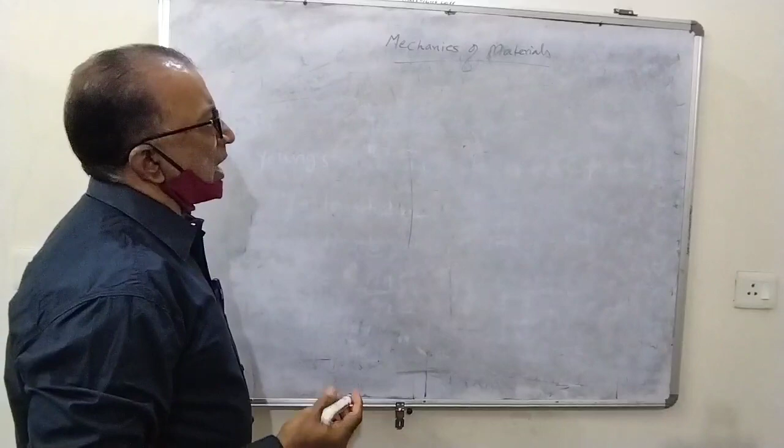In the previous class we were discussing about shear force and bending moment diagrams for the various types of beams. Now in today's class, let us start working out on the shear force and bending moment variations in the case of cantilever beams.

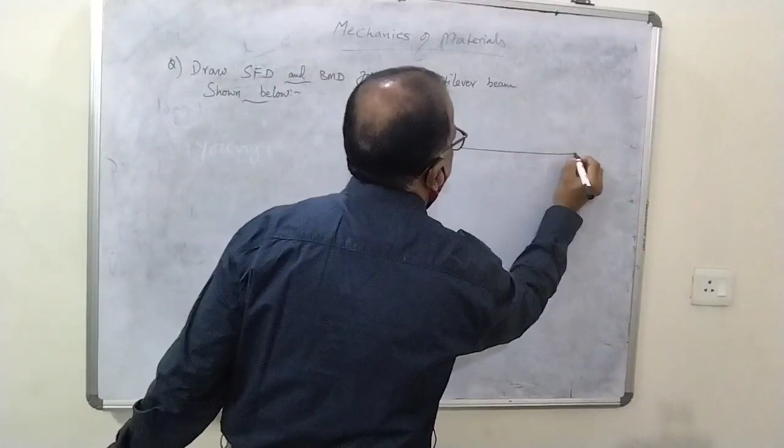The procedure is, whatever the cantilever beam is given, draw it. Let us say AB is the cantilever beam and let its span is 3 meters and it is acted upon by 3 point loads at C, D and B. Let us say this is 10 kilonewtons, this is 20 kilonewtons, this is 30 kilonewtons.

So to draw the shear force and bending moment diagram, the procedure is generally extend the lines below the points which are given on the beam on one side of the page. After then, you all know only one support is here, other support is free. Such beam is called as cantilever.

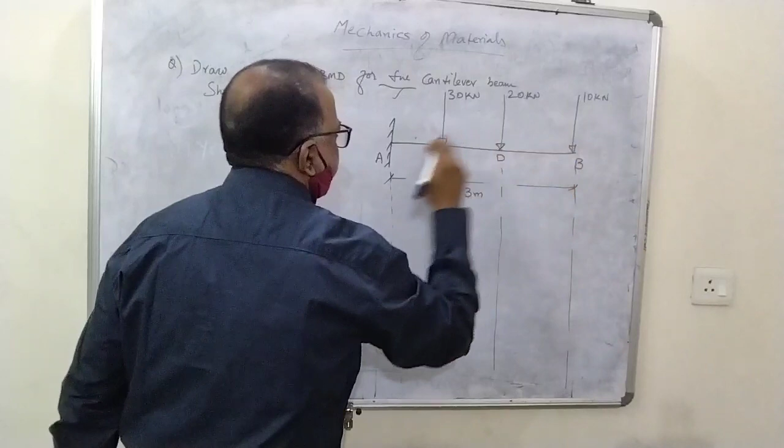So when there is only one support, whatever the action is there, whatever the loads are acting on the beam, that should be balanced by vertical reaction here at A. Any other support? No support is there, only vertical support here is VA.

So it is clear that your VA, vertical reaction, is equal to sum of the downward forces: 30 plus 20 plus 10. This is equal to 60 kilonewtons. Can you expect any horizontal reaction here? No. HA is 0. Why? No horizontal force is acting on the beam.

Aap sabko pata hai, fixed end ke paas vertical reaction aayega, horizontal reaction aayega aur moment bhi aayega, MA. So out of these 3 reactions, reactive components, VA is equal to 60 kilonewtons and HA is 0 as no horizontal force is acting.

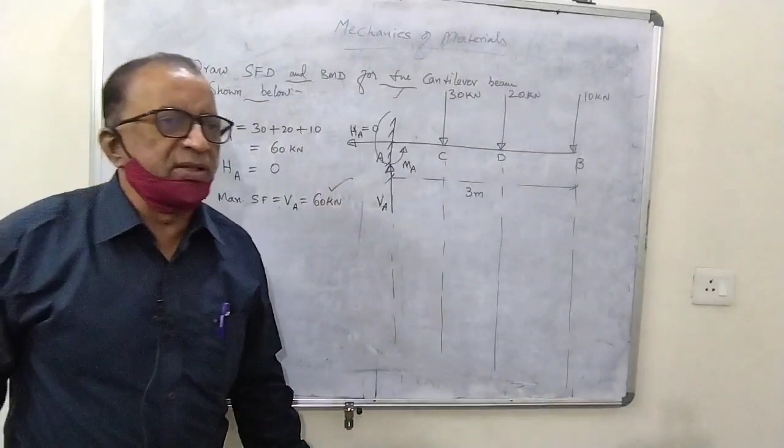Ye sahi hai aapka answer. Turant aap 30 seconds mein answer kar sakte hain ki teenon ko add kar lijiye. Agar maan lijiye 4 forces are given, if 5 forces are given, just you take the summation of all the forces, that itself is the maximum shear force.

So in competitive exams you can easily answer. In multiple choice it will be given like this: A bit 40 kilonewtons, B bit 50 kilonewtons, C bit 60 kilonewtons, D none of the above.

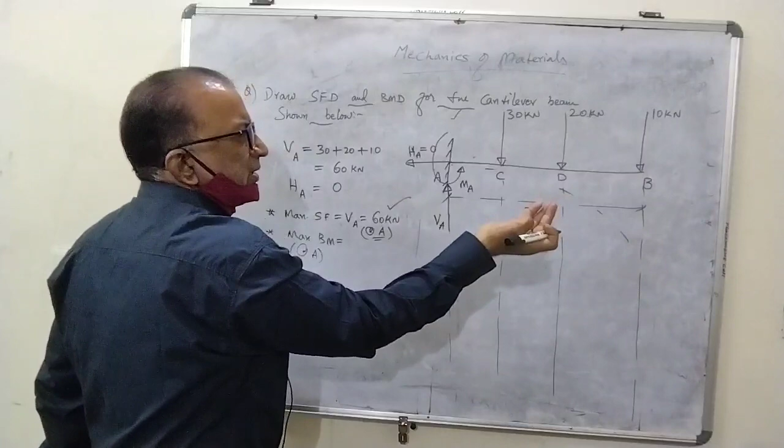Vertical force is 10. What is the perpendicular distance from here to here? Let's say this is 1 meter, 1 meter, 1 meter. So what is the perpendicular distance from the 10 kilonewton force? 10 into 3, so minus 10 into 3. Why have I taken minus? It is a clockwise hogging moment. Upward moments you can take as positive.

Come to the next load, 20 is here. What is the perpendicular distance from 20 to A? 1 plus 1, so minus 20 into (1 plus 1). Next load is 30, what is the perpendicular distance to this point? Minus 30 into 1. No other load is there.

Simply this is equal to minus 30 minus 40 minus 30. So this is equal to minus 100 kilonewton meter. What is the unit for moment? It is kilonewton meter. Why? Because load is in kilonewtons, distance is in meters, so your value will be kilonewton meter.

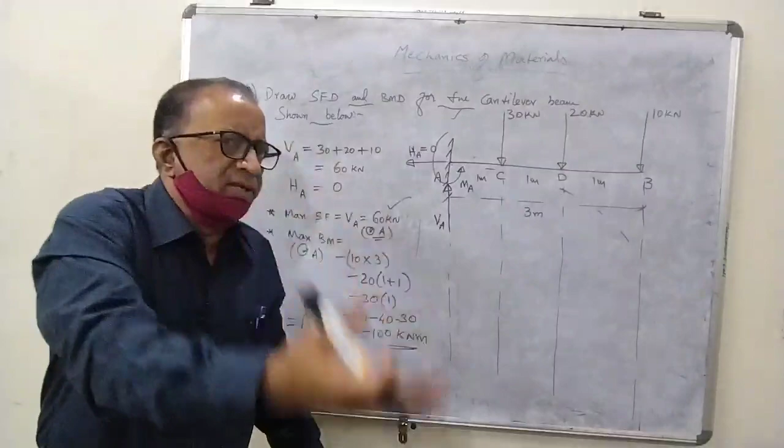So in competitive exams, not only maximum shear force, he will ask - the beam will be given like this - and he'll ask what is the maximum bending moment. You can't draw all the diagrams. The easy way to calculate maximum bending moment is simply take the moments of all the forces at the support.

How have I calculated the moment at A? First force minus 10 into 3, minus 20 into 2, minus 30 into 1. Isn't it simple? Within 30 seconds you can answer. So what is the answer for the maximum bending moment? 100 kilonewton meter. Negative indicates hogging moment.

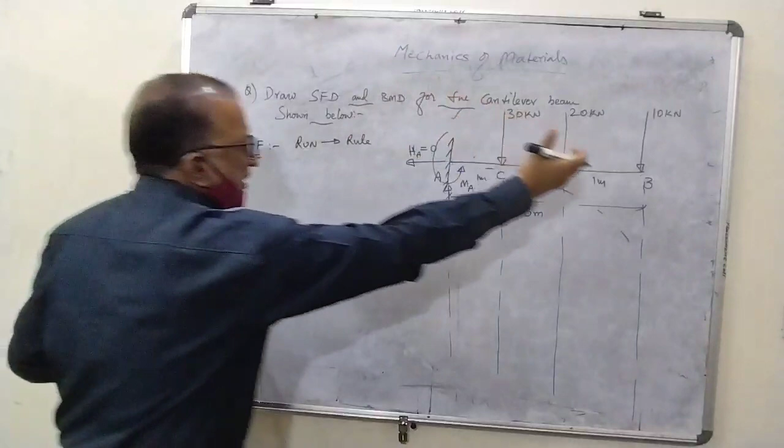Run rule. Right side, if I start from the right side, which is the first point from the right side? B. So the first point is shear force at point B. What is the direction of the force at B? It is downward. Right side upward is negative. If any downward force is there, it should be positive. So this is equal to 10 kilonewton plus.

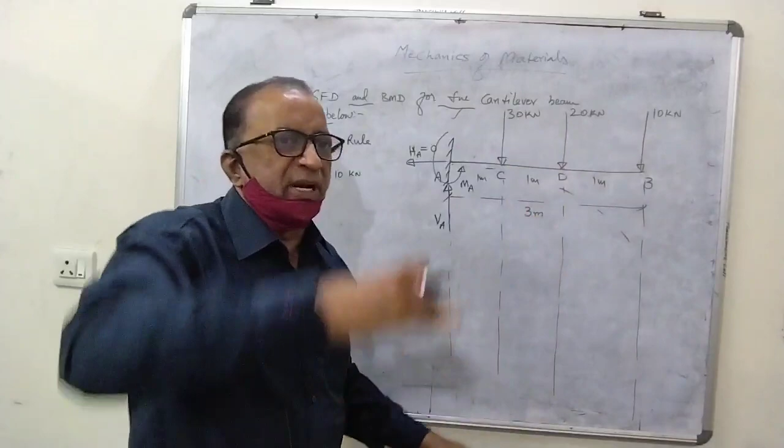Can't I write like this? Same, just before D. Am I right here? Whatever shear force I got at B, it will remain same just before D. After that, at D there is a load, so what will I write as the second point? Shear force at D is equal to the first value 10, and near D it is downward, plus 20 kilonewton.

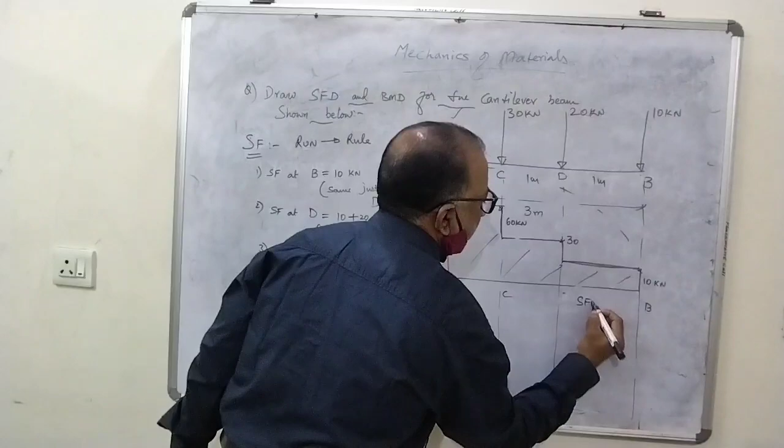It increased to 60 and remains constant up to A. So at A it is 60. So this is your shear force diagram. This is what we call shear force, meaning how shear force is changing, from right side to left side, how the amount of shear force is changing, how it is changing from B to A. On observing the overall diagram of this shear force, it is clear that maximum shear force is 60, and where is it occurring? At the fixed end A.

Is it not what I said in the beginning? In the beginning itself I told you maximum shear force is summation of all the forces, and it is at A, which is equal to VA, the support reaction at A. So the diagram also proves that maximum shear force is at A.

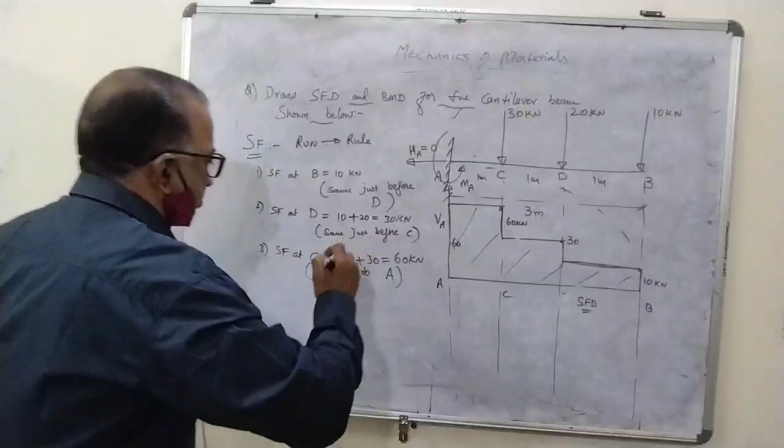Now let us go for the bending moment diagram. If I go for the bending moment diagram, which is the first point? B. Bending moment at B. What is the load near B? It is 10, but 10 is passing through B. There is no perpendicular distance to multiply it with, so it's 0. There is no perpendicular distance for the 10.

Now let's come to D. 10 into what is the perpendicular distance? 1. Bending moment at D is equal to minus 10 into 1, that is equal to minus 10 kilonewton meter. So that's done for D.

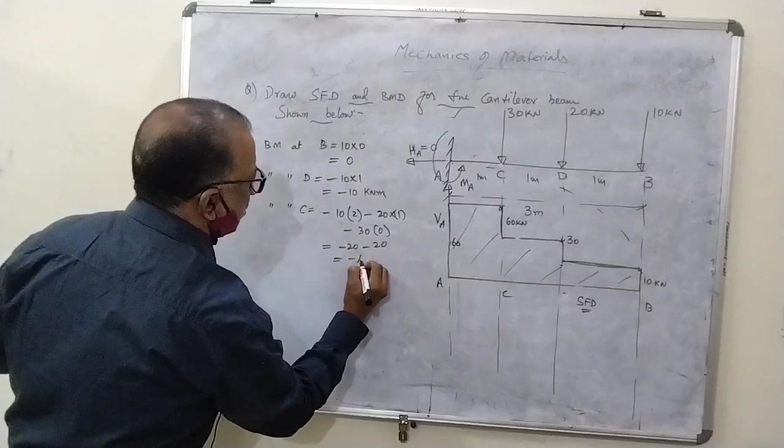So what will you do then, beta? 10 into 2, minus 20 into 1, minus 30 into 0. So it comes to minus 20 minus 20, that is equal to minus 40 kilonewton meter. Next is the last point, bending moment at A. Put your finger here. Calculate the moment due to all forces. Number 1, first force, minus 10 into 3.

Next, minus 20 into 2. Next, minus 30 into 1. This is equal to minus 30, minus 40, minus 30. This is coming around minus 100. Already I have proved this in the beginning.

This itself is your maximum bending moment. Out of all this, which is the maximum bending moment? 100 is the maximum bending moment. And where is it occurring? It is at the fixed end, which is equal to your resistive moment here, MA. MA is equal to your 100 kilonewton meter here.

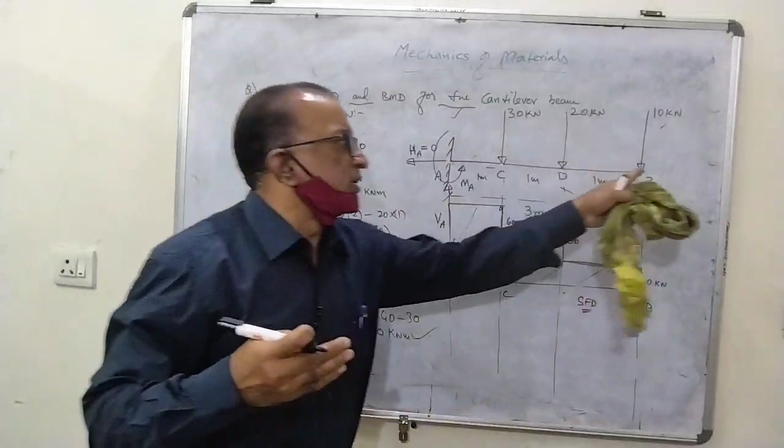As I told you in the beginning itself, if the question is given like this in the objective type, what does maximum bending moment mean? You have to take the total moment of all the forces at the fixed end. And if it is shear force, you have to take the total summation of the forces at A.

There is a difference between shear force and bending moment. For shear force, you have to add all the forces. For bending moment, you have to take the moment of all the forces about A. Is it clear? So now this is the maximum.

Now let us see how to draw the bending moment. As I said in the beginning, whatever shape the beam bends like this - a cantilever bends having convexity upwards and concavity downwards.

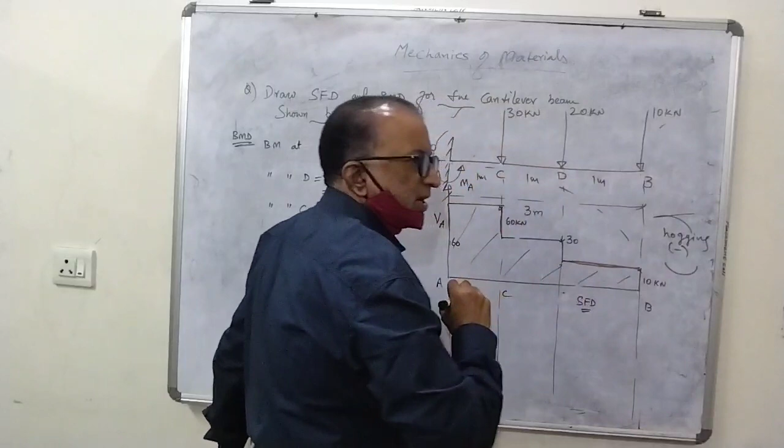Such bending is called hogging bending, which is negative. If any member bends like this, it is called positive moment, sagging moment. So the easy way to remember this: a smiley figure is positive, it is sagging.

This is somewhat indicating sadness on the face, which is negative, called hogging. Whichever bends having convexity at the top, it is hogging. Convexity at the bottom, like this, is called sagging. You'll find it in the simply supported beam, and such bending will be seen in the cantilever, which is hogging.

Hogging is negative. That's why all the bending moments I have calculated as negative values here, right? So automatically your diagram should be drawn below the reference line here. These are the salient points.

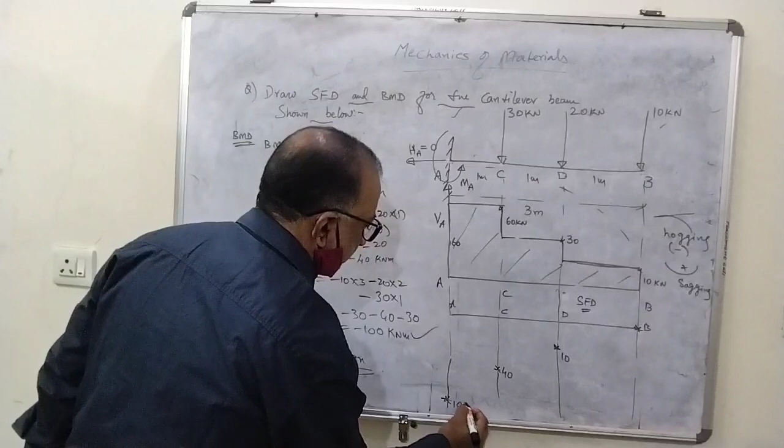How to draw the bending moment diagram now? Draw the reference line B, D, C, A. You know the bending moment at B is 0 and the bending moment at D is 10. Bending moment at another point C is 40, and bending moment at A is 100. This line is indicating 100 magnitude, this value is indicating 40, this value is indicating 10, this is indicating 0.

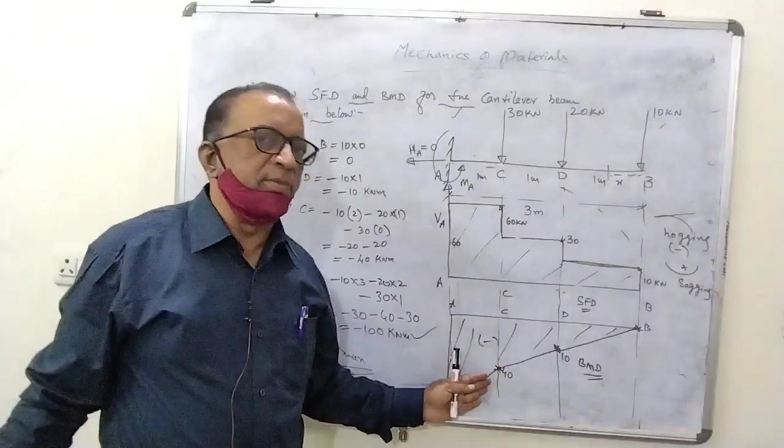This diagram is called BMD, which is bending moment diagram. So just by observing the bending moment diagram, you can easily say that out of all these values, the maximum bending moment is at the fixed end, which is equal to 100 kilonewton meter. And maximum shear force is 60 kilonewtons, and maximum bending moment is 100 kilonewton meter.

So like this we will be drawing the shear force and bending moment diagram for multiple point loads - meaning when more than one point load acts on a beam, how to draw the shear force diagram and bending moment diagram. And before that, just what are the maximum shear force and bending moment values - I have shown you in the beginning how to calculate. After that only you go to the diagrams.

Next question is once again the same: Draw SFD and BMD for the cantilever beam shown below. Meaning, draw the shear force and bending moment for the cantilever beam given in the figure.

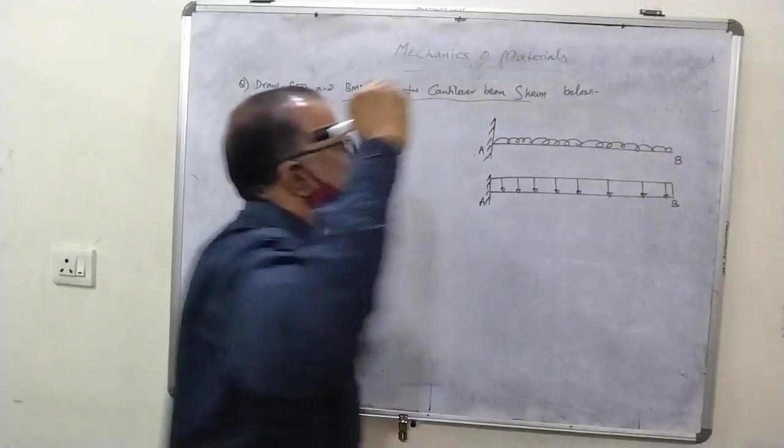I already told you UDL can be represented in the form of a coil, or some authors represent the UDL by drawing a rectangle and indicating it with n number of arrows in the downward direction. It can be represented in both the ways, either as a coil or as a rectangle with n number of loads.

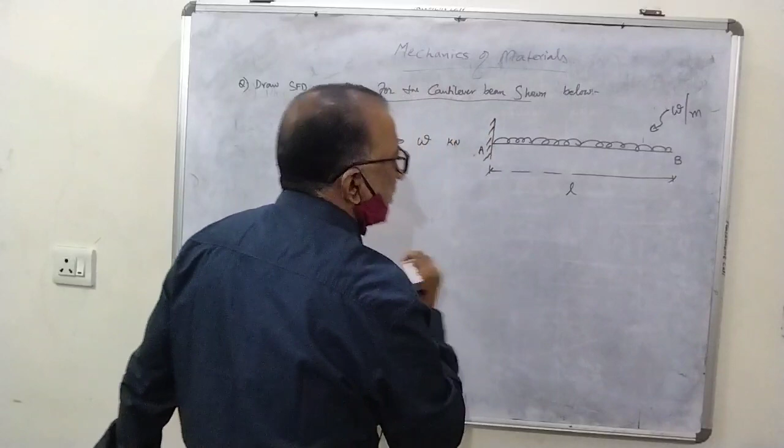In the previous lectures I explained the intensity of the UDL is W per meter. This means for 1 meter length of the beam, the load is W kilonewtons. If this span is, say, L meters, or if the total length of the cantilever beam is L, then first 1 meter, second 1 meter, third 1 meter, like that.

N number of parts are there. For every 1 meter piece of the beam, you locate the centroid. Let us say this is the center. At the center, W kilonewton load is acting. For the next 1 meter, another W is acting. For the next 1 meter, W is acting. Like that, for each and every 1 meter, W kilonewton is acting. So this is a combination of all parallel forces with n number of W acting.

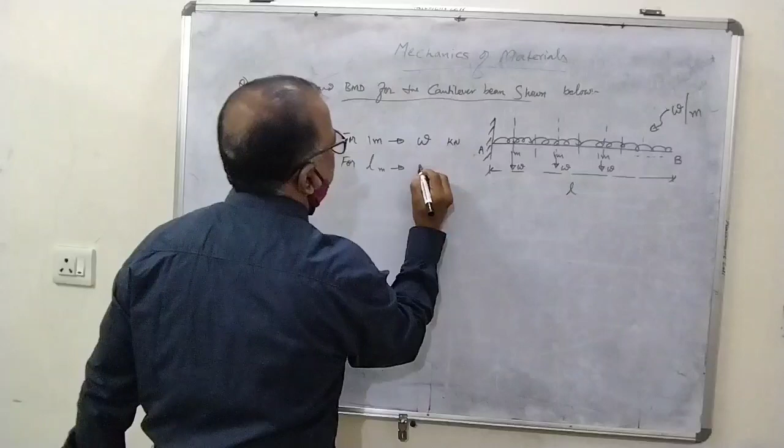So what is the resultant of all this? Resultant is common sense: for 1 meter if it is W, for L meters what is the load? W into L kilonewtons. Where will this W into L act? It will act near the center of the whole beam, the whole span, that is at L by 2. Let us say this center point is C, the load W into L will act there.

What do we call this? Total UDL, uniformly distributed load. Why is it called uniformly distributed load? Because for every 1 meter segment of the beam, the intensity of the load is the same, W. That is the meaning, there is no variation of the load.

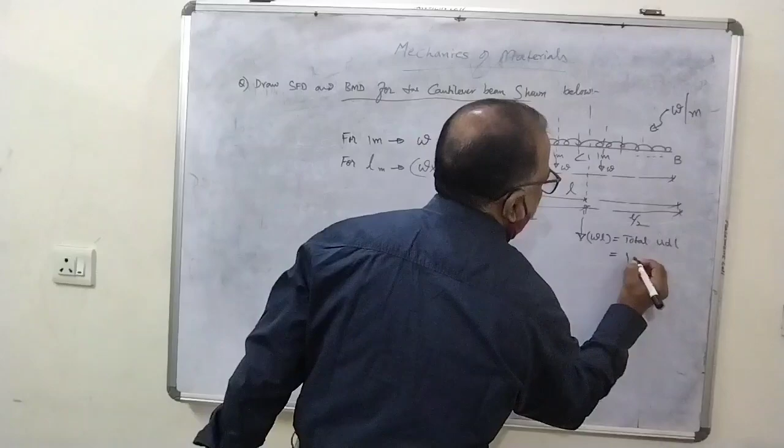For the first 1 meter it is W. For the second 1 meter it is not 2W or 3W, it is the same. That is the meaning. The load is equally distributed over the whole span, over the entire length, so this is called total UDL, and we can represent it as capital W. See, there is a difference between small w and capital W.

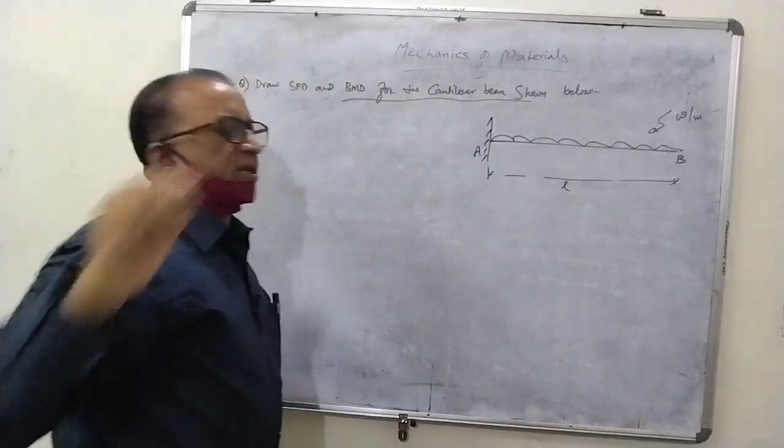Whenever such general loading is given, let me explain before that. As in the previous problem, I explained one vertical reaction, and you all know the horizontal reaction here is 0 because there is no horizontal load acting, and you will also get one fixed end moment, MA.

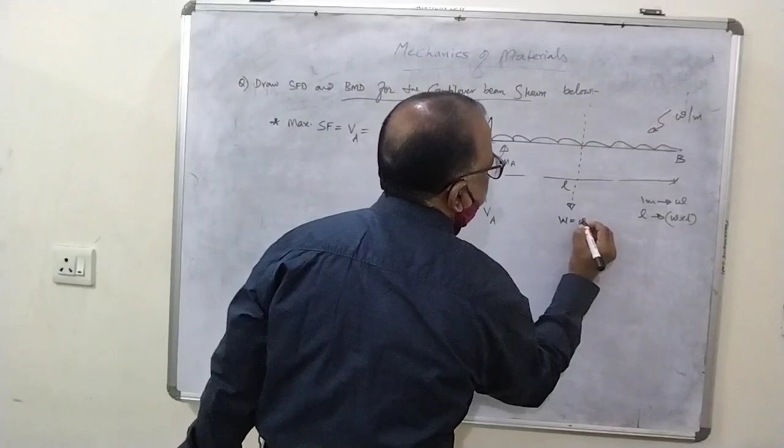So now tell me how many loads are there on the beam? Only one load is there, UDL. So your VA is automatically equal to WL, that is the maximum shear force. What is the maximum shear force? WL is the maximum shear force.

Similarly, if maximum bending moment is asked in objective questions, where will the maximum bending moment be? You all know, you will get it at the fixed end, maximum bending moment.

Put your finger here, just check how many loads are there on the right side. Only one load is there. What is the distance from here to this load? You all know it is at the center, L by 2. So load WL into distance is L by 2. Minus WL cantilever into L by 2, this is equal to minus WL square by 2.

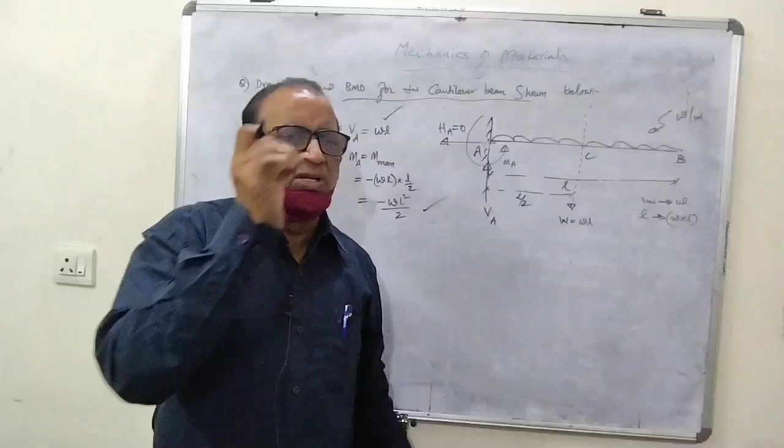So if someone asks you, if a cantilever beam is acted upon by a UDL W per meter for the complete span L, what is the maximum shear force? You should answer it as WL. Maximum bending moment is load into distance, minus WL square by 2.

This is from the objective point of view I explained, but we have to draw the shear force and bending moment diagram here. So for this, let us go for it as per the procedure. To draw the bending moment and shear force diagram, whenever such general loading is given, W and span is given, you choose one section XX at a distance of X from the right support.

See, general, what I am writing here is the general SF equation, general shear force equation. Now you draw the free body diagram, separate that total small part X and then draw the diagram.

W per meter. XX, what is the distance here? X distance. Now tell me, what is the load here? Here the equivalent load is W into X. Why? Because for 1 meter it is W, for X meter it will be WX. And at what distance will it be acting? X by 2, at the center. So now, shear force at XX.

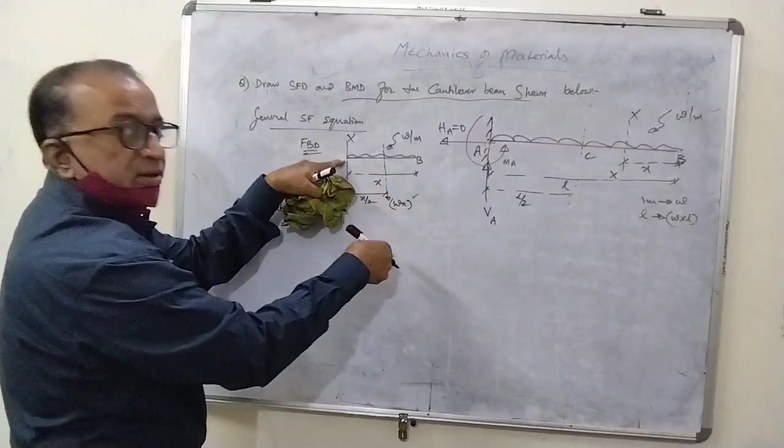To the right side of XX, how many loads are there? Only WX is there, you are taking the right side. If you follow the run rule, right side means run rule, right side upward is negative. So you are getting downward here, it is positive. So the equation is W into X.

Am I right here? So which is the variable here? Span, length is the variable, X. So what power did you get for X? 1. When you get power of 1 for X, it means the shear force diagram is a linear diagram, a straight line diagram, because the variable power is 1 here.

But now let us calculate the shear force values. Where do you need the first point? Shear force at B. So where does this section start? You start from B, so the initial point is B. Therefore, at X is equal to 0, that means at B. If you put X as 0 in the above equation, the value of shear force is 0.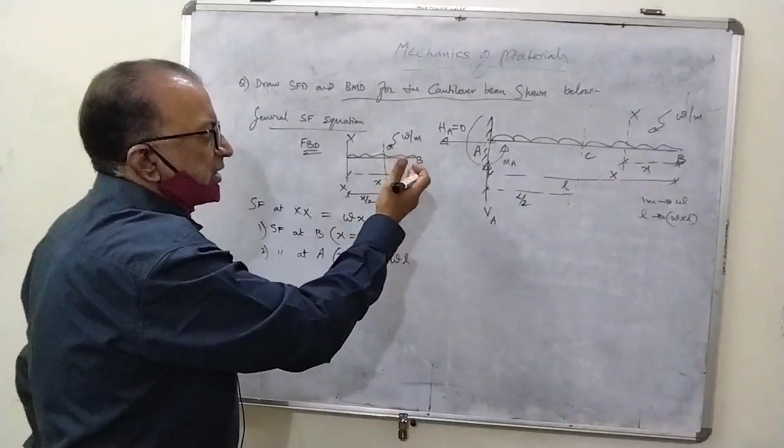Next, number 2, shear force at A, which point is it? A. Put X is equal to L. What is the distance at A? You started your journey from B, so what is the distance of A from B? It is L. So if you substitute L in this equation, W into L. Is there any other point? No. So at B it is 0, at A it is WL.

So now if I draw the diagram for the shear force, this is B, this is A. At B it is 0, at A it is equal to, what is the value at A? At A it is equal to W into L. So these are the 2 points. How to join these 2 points, is it by a straight line or by a curve? It is by a straight line, because the variable power is 1 here.

So simply you join by a straight line.

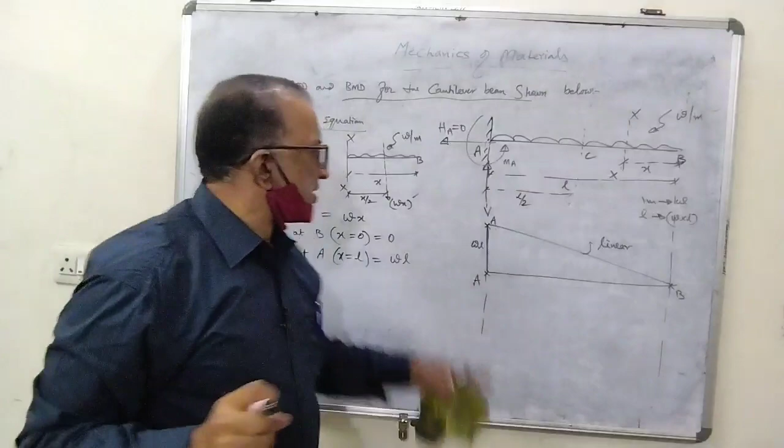So this is written as linear. Many times in competitive exams, the question asked is: the variation of the shear force diagram for any UDL is linear, second degree parabola, cubic parabola, or none. Your answer should be linear, because it is based on this general equation. This line is a straight line, a slope line, so your slope remains constant.

Not only this, in many competitive exams they have asked, given this shear force diagram, what is the area of the shear force diagram? The question asked is, if a cantilever is having UDL for the total span, W per meter for a length L, what is the area of the shear force diagram? First of all, we should know what is the shape of the diagram.

It is a right angle triangle. What is the height of the triangle? Maximum shear force WL. What is the base of the triangle? L. So the area is half into base into height. This is equal to half into L into WL, which comes to WL squared by 2.

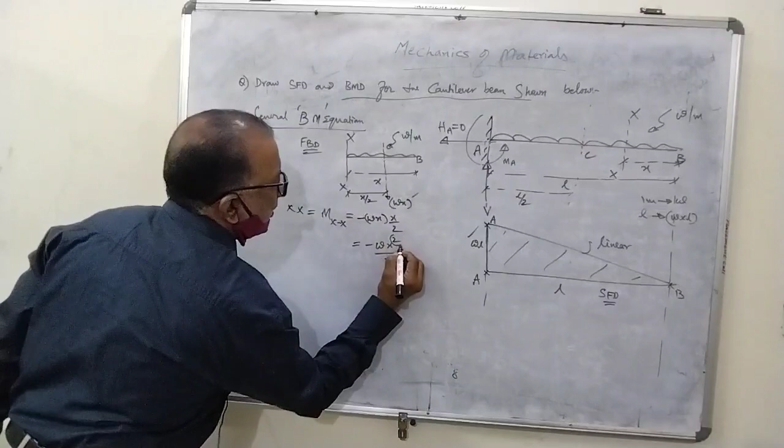Now just see, what power are you getting for x here? Second degree. Second degree means your bending moment diagram variation is second degree parabola. Many times in exams it has been asked, the variation of the bending moment diagram of a UDL is linear, second degree parabola, cubic parabola, or none. You should answer it as second degree parabola, because the power you are getting for x is 2 here, second degree parabola.

Now let us calculate one by one using this general equation. Where is our first point? B. So what is the value of x? 0. So bending moment is 0. Next is number 2, bending moment at A. Put x equal to L in the same equation. It comes to minus WL²/2.

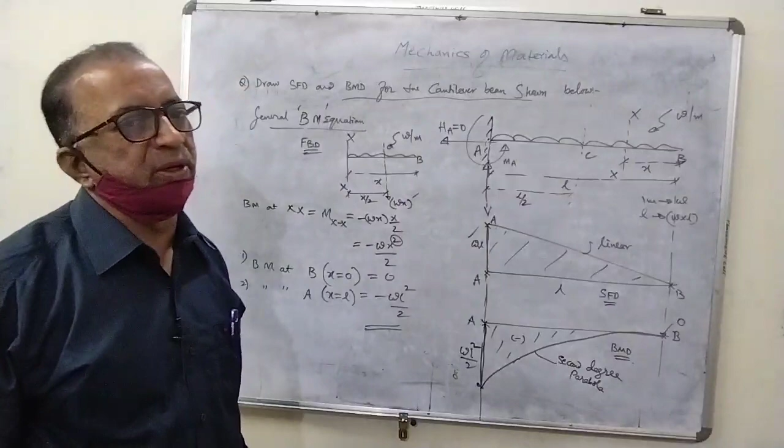I hope all of you got it, how to draw the shear force and bending moment diagram, what are the shapes of the shear force and bending moment diagrams, and what are the maximum values of shear force and bending moment, and how to draw it by taking the general equations. I have clearly explained to you. Let us go to the next problem.

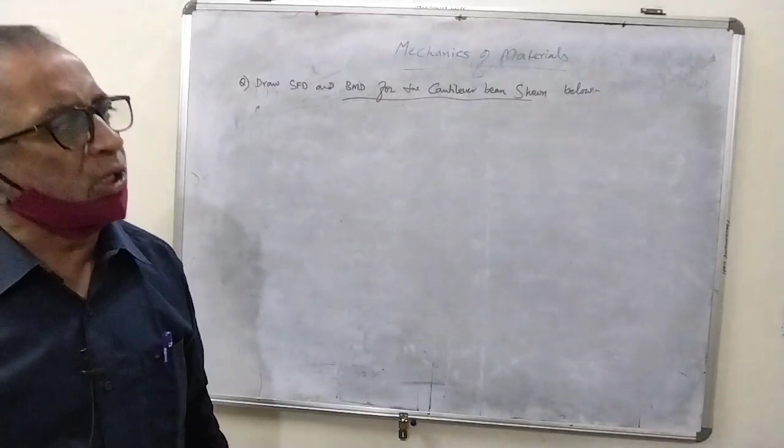Same question, draw SFD and BMD for the cantilever beam shown below. So draw and find out the shear force and bending moment diagram for the cantilever beam given below.

Now let us take the combination of UDL and point load, or I'll explain if the UDL is partial. Here we have 10 kilonewtons, 5 kilonewtons, 2 meters, 2 meters, the load intensities, let us see.

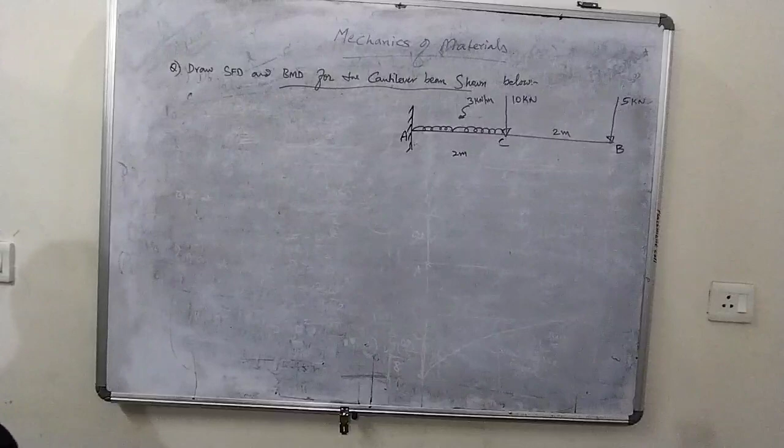Okay, let's continue. The next problem is we have to draw the shear force and bending moment diagram for the cantilever beam shown below. This means on this cantilever beam the load is a combination of UDL and point loads. A combination of two loads are there, let us see.

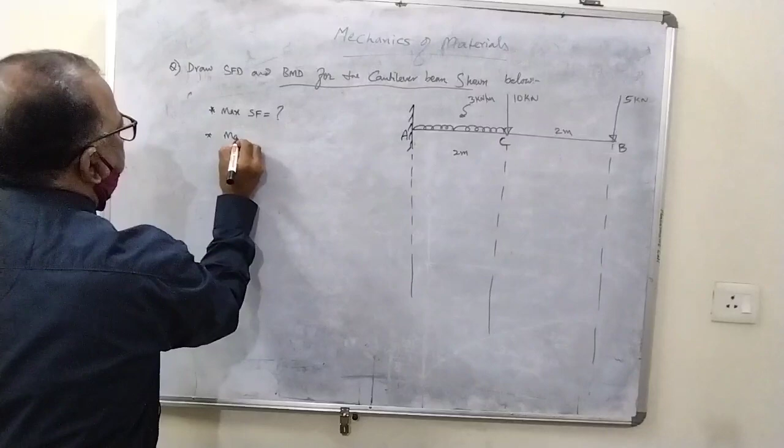First of all, from an objective point of view, what is the maximum shear force? Next, what is the maximum bending moment?

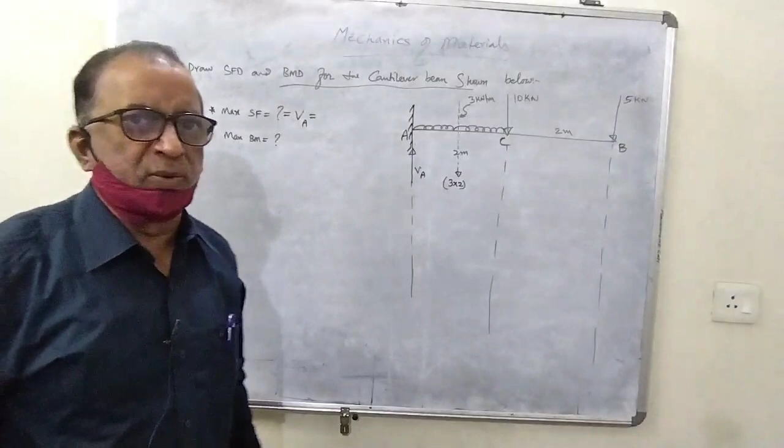I told you, WL. For 1 meter it is 3 kilonewtons, for 2 meters what will be the resultant load? 3 into 2. Where will it act? At the center of the 2 meters, that is 2 by 2.

Now please all of you listen carefully. The maximum support reaction is nothing but the maximum shear force. The symbol for shear force, you can give it as Vmax, or you can give it capital S for shear force. Different authors give different notations for shear force. So it can be Vmax or Smax, the maximum shear force, which is at VA.

So now tell me, what is the value? 5 plus 10 plus 3 into 2. 5 plus 10 plus 3 into 2 is 15 plus 6, which is 21 kilonewtons. So your maximum shear force is 21 kilonewtons. Have you not calculated this within 30 seconds or within 1 minute?

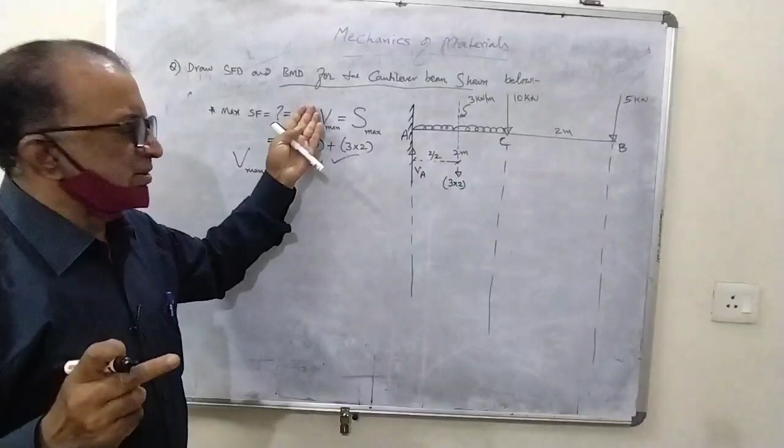In competitive exams, a maximum of 1 minute will be given for each objective question. So if the question asks for maximum shear force, simply you have to add up all the forces. The summation of all forces is nothing but balanced by this vertical reaction here. Sum of upward is equal to sum of downward, to keep it in equilibrium. So VA value is the maximum shear force. Within 1 minute we got the answer.

In a similar way, maximum bending moment, symbol is Mmax. Already I told you, you will get the maximum bending moment at A, that is nothing but MA. What is the value of MA? Calculate the moments of all the forces.

First force moment, minus 5 into the total distance, which is 2 plus 2. So minus 5 into 2 plus 2. Next load, minus 10 into 2, minus this UDL, 3 into 2 into 2 by 2. Am I right here? So your maximum bending moment is coming to minus 5 into 4, minus 20, minus 20, minus 6.

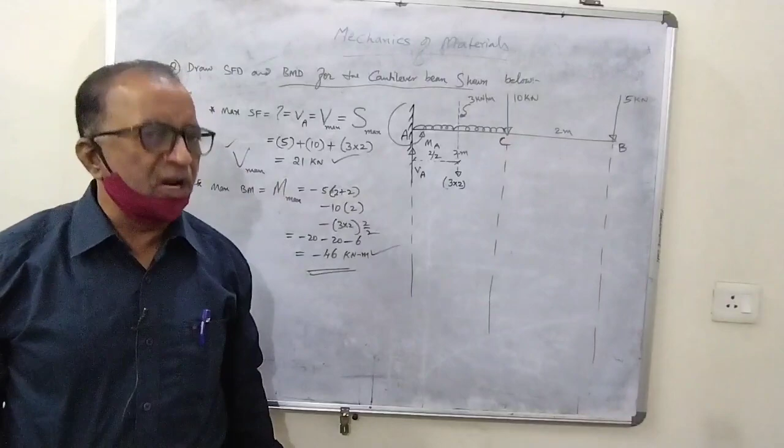This is equal to minus 46 kilonewton meter. This is your maximum bending moment. Have you not calculated this within 1 minute? So if the loading is like this, the procedure for calculating the maximum bending moment is like this. This is the value, and maximum shear force is this. This is related to your objective questions, if it is asked you can easily answer it.

Now let us go for our aim. What is our aim? How the shear force is changing from left hand to right hand, or right hand to left hand. So now,

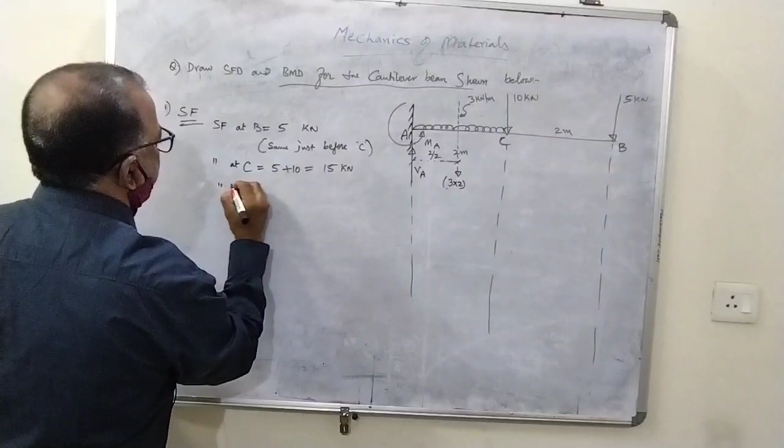This 15 kilonewton value at C will not remain the same up to A. Why? Because between C and A there is a UDL. So keep in mind, at C this is the value. Next at A, previous value is 15 plus the total UDL, which is 3 into 2. This equals 21 kilonewtons.

So out of these three values, what you observe is the maximum shear force is 21. Already I have shown you before where you get the maximum shear force - at the support, at the fixed end. So how do we draw the diagram?

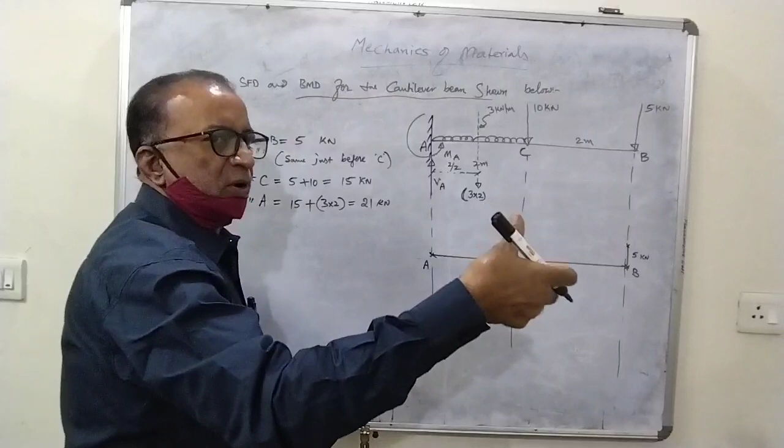This is B, this is C, and this is A. At B, it is 5. Give it some height, like in a graph sheet, take some scale for 5. And up to C, it remains constant, a straight line.

At C, immediately it increases - by how much? By 15. It rises up. At A, the total value is 21. So 15, this is 21. How do we join 15 to 21? With a slope. So this is your shear force diagram.

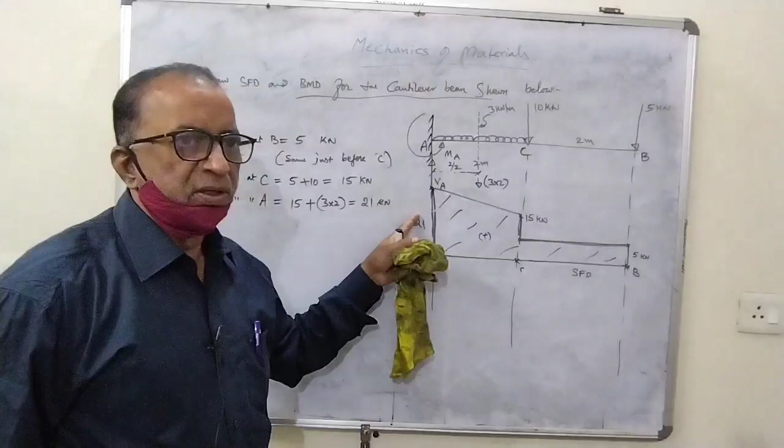Total is positive, this is the SFD. Keep in mind, many times they ask what is the variation of shear force along a UDL. Whenever you have a UDL for a certain portion, the shear force diagram is a slope line, not constant. Why? Because point to point the load is being added. That's why shear force is the summation of all forces, so point to point it changes and increases up to the end of the UDL.

I hope all of you understood how to draw the shear force diagram. Now you can compare from this total diagram what is the maximum shear force. 21 is the maximum shear force and the minimum is 5 kilonewtons, which you get at B.

So in a similar fashion, let us calculate the bending moment diagram. Bending moment number 1, first point. Bending moment at B, you all know is 5 into 0. There is no distance for the 5 to multiply, so 5 into 0 is 0.

Next, bending moment at C. At C, how many loads are there on the right side? 1 load, minus 5 into 2, which is minus 10 kilonewton meter. Next is bending moment at A.

Once again come from the beginning. Minus 5 into 2 plus 2, that is the total distance, 4. Next load is 10, minus 10 into 2.

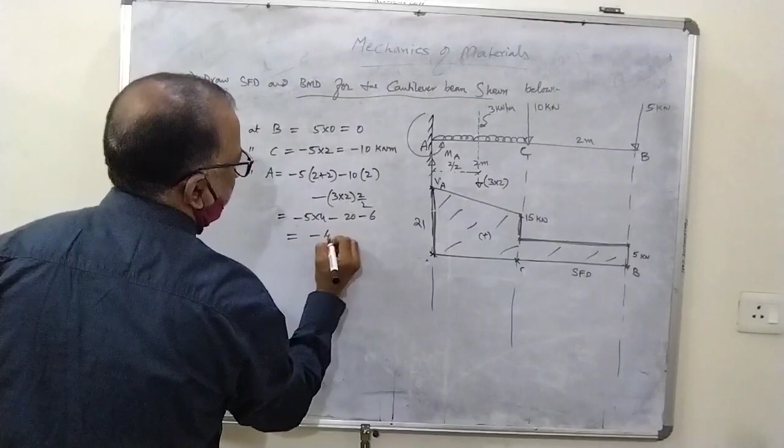Next the UDL is there, minus 3 into 2 into the perpendicular distance, 2 by 2. So this comes to minus 5 into 4, minus 20, minus 6. Minus 46 kilonewton meter is the maximum bending moment at A, which is called as M max. This is nothing but the bending moment at A.

So you will see how we plot the bending moment diagram. Now you should carefully observe how we are going to draw the bending moment diagram. B, this is the C point and this is the A point.

What is the value at B? 0. What is the bending moment at C? Minus 10. What is the bending moment at A? 46. This total height is 46, this total height is 10.

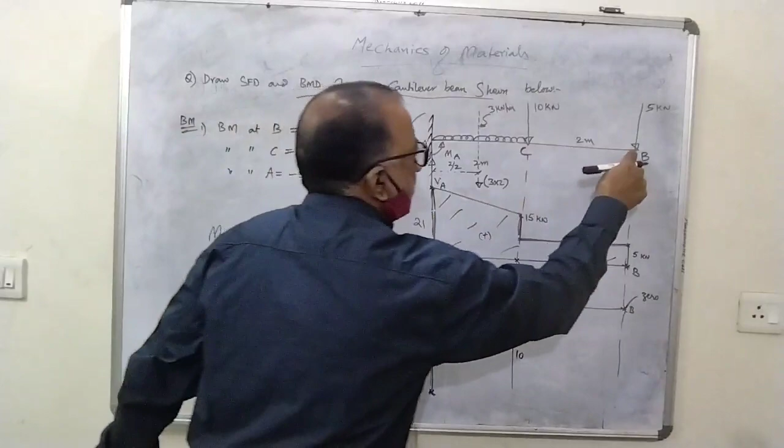Here it is 0. Now, the common sense is, between B and C, is there any load? No load, which means no UDL is there. So whenever there is no UDL between point loads, how do we join them? With a straight line - this is linear.

There is no UDL here, but from C to A there is a UDL. Already in the previous case we have seen wherever there is a UDL, you get the bending moment diagram as a second degree parabola. So how do we join this 10 and this 46? Draw a curve here. So the bending moment diagram is partly linear and partly parabolic, and this is a second degree parabola.

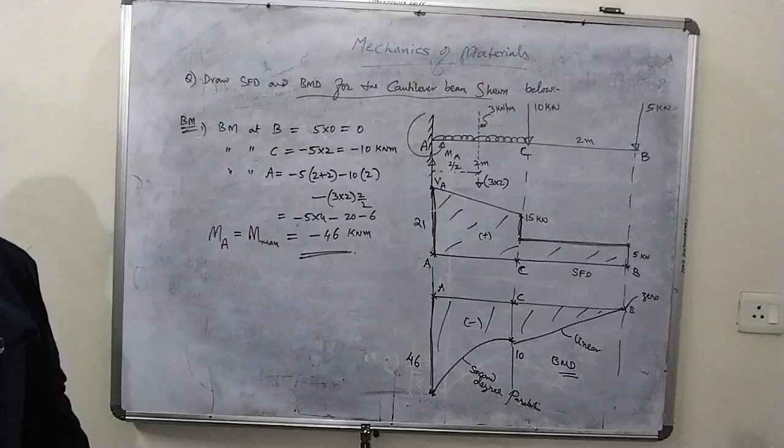So total hogging moment, if you shade it, this total setup is called the bending moment diagram. I hope everyone got the idea, or got familiarity with how to draw the shear force diagram and bending moment diagram when there is a combination of UDL and point load.

Now in this case, I have taken the UDL partially - not for the full length, partially from the fixed end, and it is discontinuous. Now what I will do in my next problem is shift the same UDL to the next segment, the second segment, and the first segment will be free. Let us see how the shear force and bending moment diagram changes.

The question is the same: draw the shear force and bending moment diagram for the cantilever beam shown.

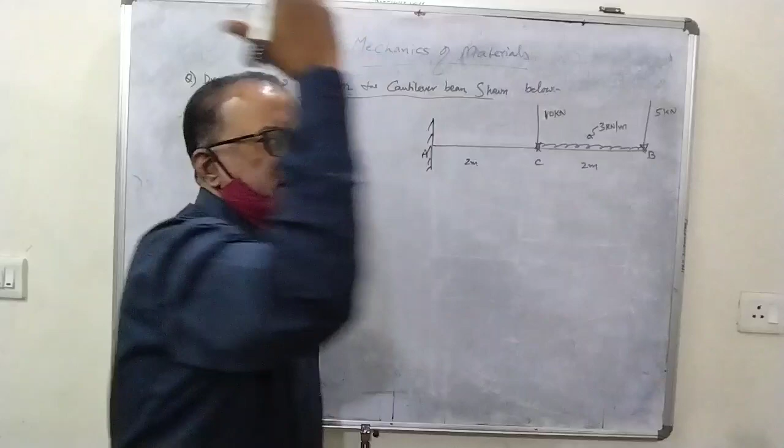What I will do now is, this is B, this is A, this is C, which is 2 meters. 2 meters. Earlier the UDL was from the fixed end and it was discontinuous. Now the UDL is from the free end and it is discontinuous after C. Same, let us take the same load 3 kilonewton per meter and same point load here 5 kilonewtons and the point load of 10 kilonewtons, and there is no load between A and C. You have to draw the shear force and bending moment diagram for this.

Once again the question arises, what is the maximum shear force? Same, no difference, but bending moment changes. Why? Because another important point, for whatever UDL you get, please convert it into total UDL. For 1 meter it is 3, acting for 2 meters, 3 into 2, this is for a length of 2 by 2 from C. Whatever the UDL length is given, put its total UDL at the end, either from the left hand or the right hand, it will be at the center, 2 by 2, 2 by 2. So how many loads are there on the system? 5 kilonewton, 3 into 2, and 10 -- 3 loads are there. So now, once again, maximum support reaction is nothing but VA.

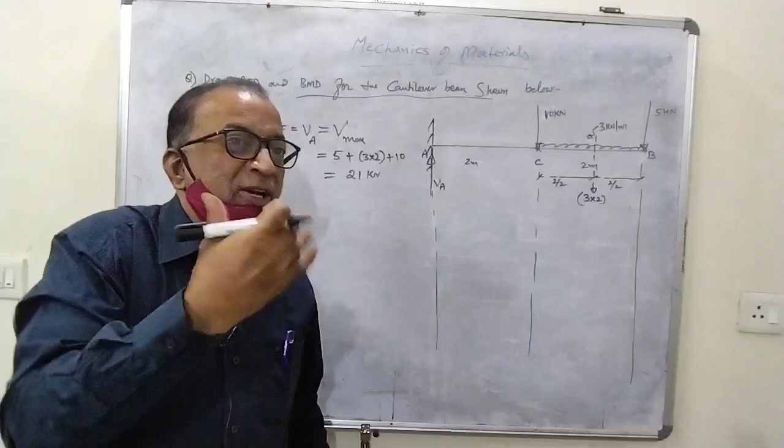That itself is maximum shear force. You all know, simply add it: 5 plus 3 into 2 plus 10. How much is it here? Same, 21 again. But where will you get the difference? In the bending moment you will get the difference. Why? Because the position of the UDL is changed here. So when the position is changed, while calculating the moments, the distance will be changed. So automatically there will be some change in the bending moment.

So this is the maximum shear force. Next, keep in mind, this is for competitive objective type questions. How will it be asked? Maximum, and where it is -- at A, you will get the maximum bending moment at A support. So first calculate the moments.

Minus 5 into the total distance from 5 to A, 2 plus 2. Next UDL, minus 3 into 2 into the distance, which is 2 by 2 plus 2. Am I right? The distance from 3 into 2 to A is 2 by 2 plus 2. Next, minus 10 into 2. So this equals 5 into 4, minus 20, 6 into 3 is 18, minus 20.

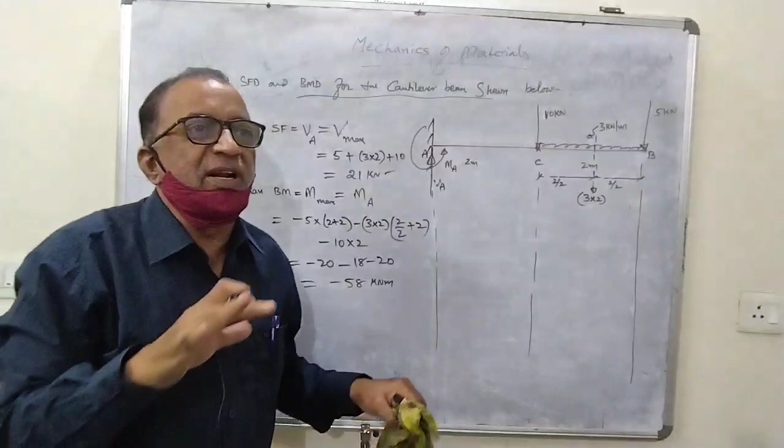Minus 58. In the previous case, when the UDL was between A and C, you got around 46. But when the UDL is shifted, you got the maximum bending moment as 58. But the shear force is the same, it is constant. Wherever you place the loads, the shear force will not change, it is just a summation of all forces. But when you come to the bending moment, since it is load into distance, when you change the position of the load, your distance also changes. Automatically there will be a change in the bending moment. So this is your maximum bending moment, this is your maximum shear force, just from the competitive point of view.

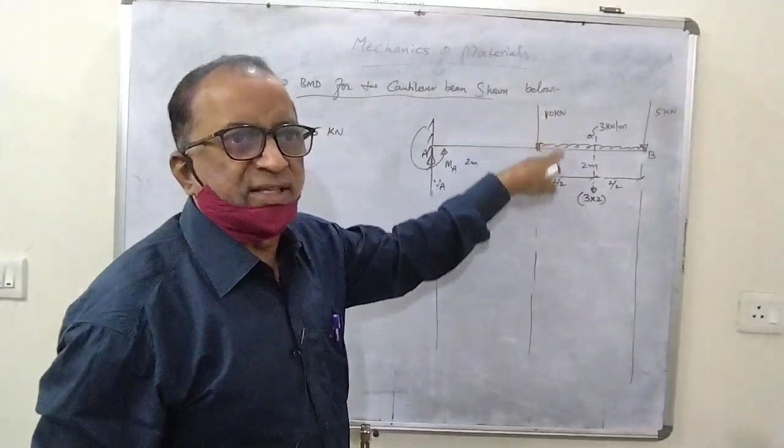Now let us draw and see how we will get the shear force and bending moment diagram. Number one, shear force. First point, shear force at B. First force is 5 kilonewton, 5 kilonewton plus. Now you should be very careful when you start your journey from B and move towards C. How many loads are there between B and C? UDL as well as point load, 2 loads are there between B and C. After 5, UDL is there and 10 is there. So since you are facing 2 loads, calculate one by one, not at a time. Don't go directly to 10 at C, just before C you calculate, meaning we are not considering 10 here.

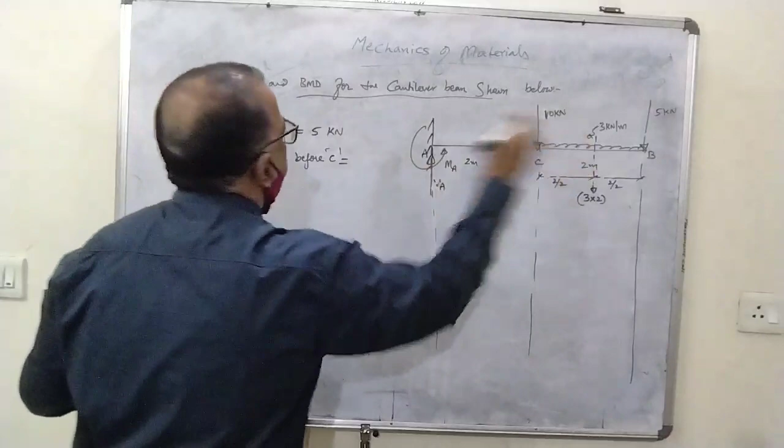So next point is shear force just before C. Keep in mind, your journey is from B. You have started your journey from B, so just before C means right side of C, or at C. So just before C, what will come? Previous value is 5, and between just before C and B there is a UDL, downward plus 3 into 2, it comes around 11 kilonewtons. Next is third point, shear force at C. Previous value is 11, but at C there is a 10, so 21 kilonewtons. Now tell me, is there any load between C and A? No load, so you can write it remains same up to A. This is your shear force calculation.

Now if I draw the diagram, this is B, this is C, and this is A. At B it is 5 kilonewton, and just before C it is 11. Immediately from 11 it has increased to 21, and it remains the same up to A.

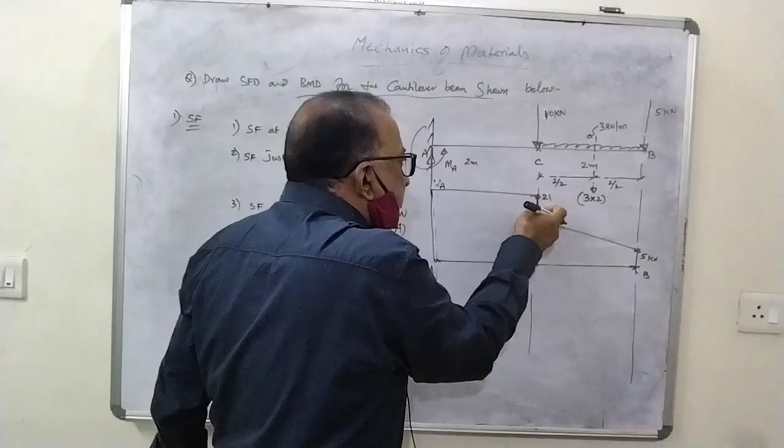Is it clear? From just before C it was 11, immediately at C it has increased to 21, and there is no load between C and A.

This is also another important objective question. Between the point loads the shear force remains constant, no changes. But when there is a UDL in between any 2 points, your shear force changes. Between both point loads, shear force stays constant. Wherever there is a UDL, shear force keeps changing. So I hope the shear force diagram is clear for all of you.

This is SFD, shear force diagram. Next, let us go for the bending moment calculation.

So bending moment, first point at B, you all know there is no distance for 5 into 0. Next is bending moment at C. At C you can calculate. Why? Because even if you include the 10, both of them included once, what will the value of 10 be? It will be 0 right? The bending moment due to 10 is 0 here. There is no distance for the 10 to multiply. So start from the beginning.

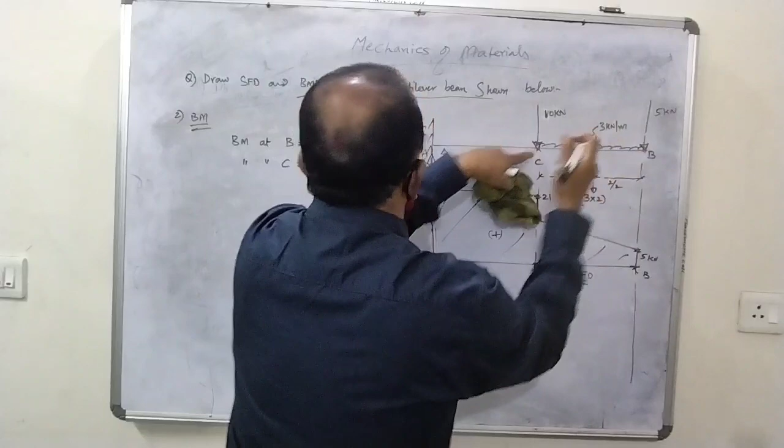Minus 5 into 2 for the point load. Next is UDL, minus 3 into 2 into 2 by 2. If you want, you can add 10 also, but the distance is 0 for the 10. Why? Because 10 is passing through C. Minus 10 minus 6, that is equal to minus 16 kilonewton meter.

Next is bending moment at A. That is equal to, start from the beginning, minus 5 into 2 plus 2. Next, UDL 3 into 2 into 2 by 2 plus 2. Next is 10 minus 10 into what is the perpendicular distance? 2. So this is minus 5 for the 20, minus 6, 3 18, minus 20. It is coming around 58 kilonewton meter.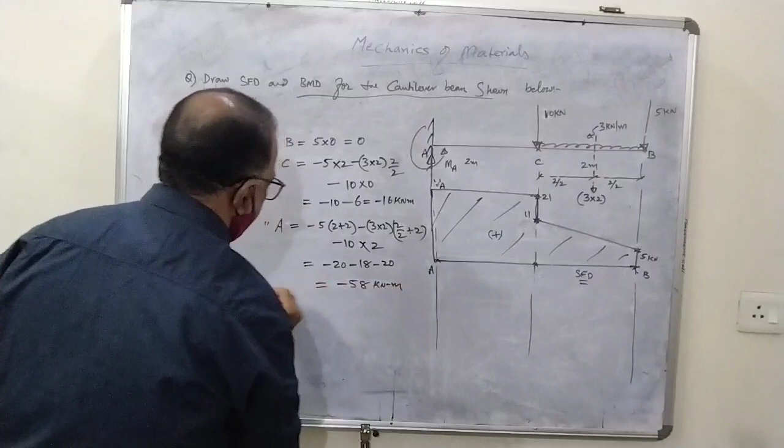Now, is it not your MA as well as max? What I have shown in the beginning. What is the amount of maximum bending moment for you? Out of all these values, maximum bending moment is 58 kilonewton meter.

So, if you draw the diagram, this is B, this is C, and this is A. At B it is 0. At C you got it as 16. And at A you got it as 58.

Now how to join between B and C, 0 and 16? There is a UDL, so you draw a parabola. Is there any UDL between C and A? No, you draw a straight line here. This is the way, so this is second degree parabola, and this portion is linear. Minus hogging moment total. This is your BMD.

I hope all of you got the idea how to draw the shear force and bending moment diagram when a combination of UDL and point load is given, or exclusively when UDL is given, which I have discussed previously, and exclusively when multiple point loads are given, more than 1 to 2 point loads, how to draw the diagram. That's what we have seen. And just I want to give you a summary on this.

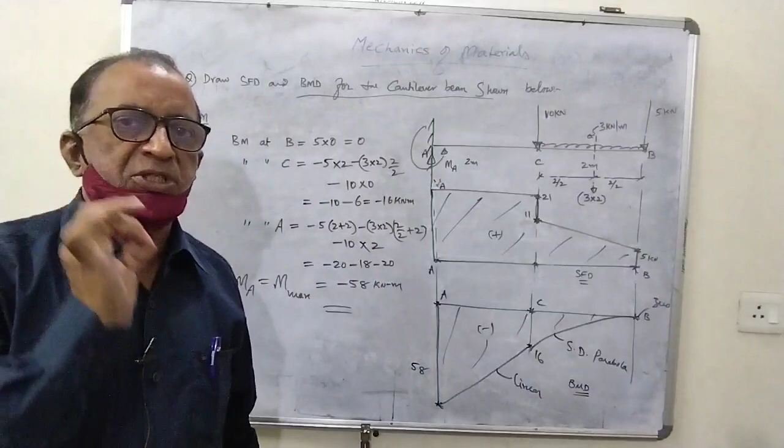Keep in mind, point number 1, in between the point loads, in between the concentrated loads, your shear force remains constant. But when there is a UDL, the shear force doesn't remain constant, you will get a slope line. Point number 3, the bending moment diagram for the point loads is straight line, linear, whereas the bending moment diagram for a UDL is parabolic, that is second degree parabola. For whichever portion of the UDL, the shape of the bending moment diagram is second degree parabola.

You have to join the points by second degree parabola, but for the point loads, it is linear. Another very, very important point: when there is a combination of point load and UDL, no doubt point load is also there, UDL is also there. But you can't think that for point load it is linear, for UDL it means second degree parabola. But which is dominating here?

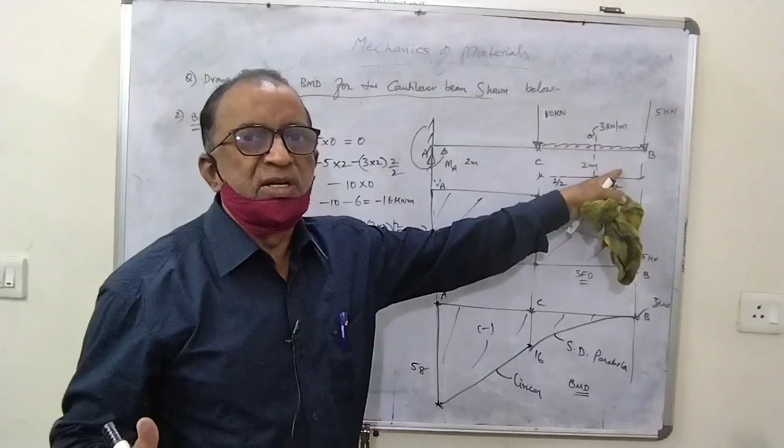The equation, the power for the variable is x square you will get in this UDL. That's why, no doubt, though there is a point load, when the UDL has started, your total diagram will be parabolic, second degree parabola. Either exclusive UDL or UDL plus point load, if it is coming to you, then you have to draw it as parabolic. So if there are point loads in between, you will get it as a straight line, nothing but a slope line, which is linear.